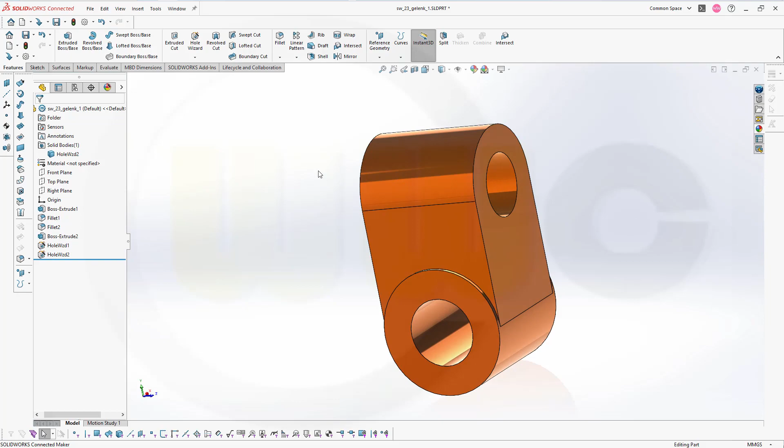Let's take a look at the drawing. Here it is, and you could make a screenshot, but I think it's a very simple exercise, so you might not need it. But let's have fun with SolidWorks.

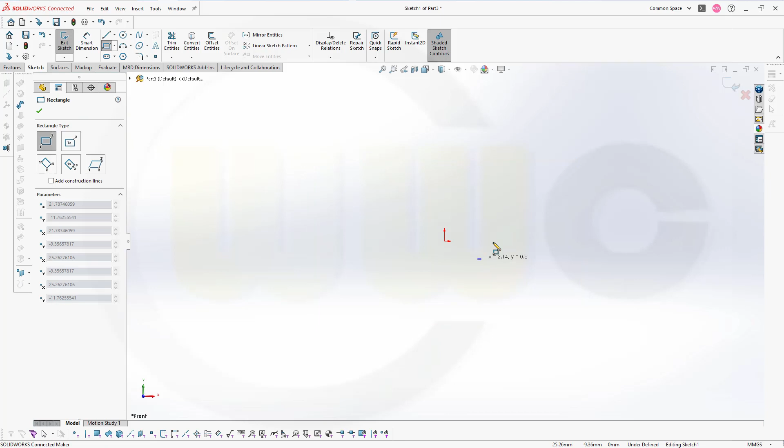Let's start with a sketch on the front plane. I need a rectangle, and this should be 56 by 118. Let's make it symmetric by using the origin and the midpoint of this line here, make it coincident. Finish that sketch.

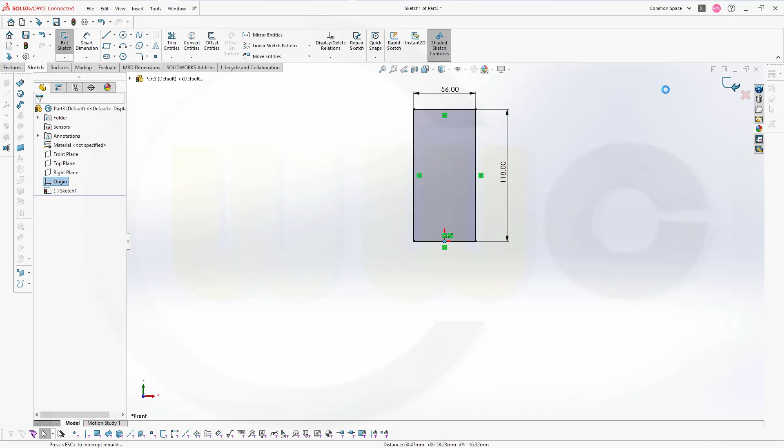Now let's make an extrude. Make it mid-plane so it's symmetric and make it 60 millimeter. Confirm. Now let's go for a fillet. I want to have a full round fillet.

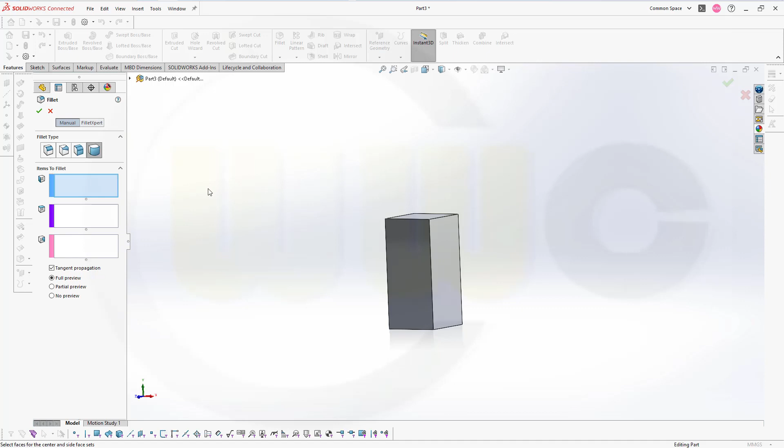That's the first face, that's the second face, and that's the third face. Confirm. Go for another one.

First face, second one, and third one. Confirm.

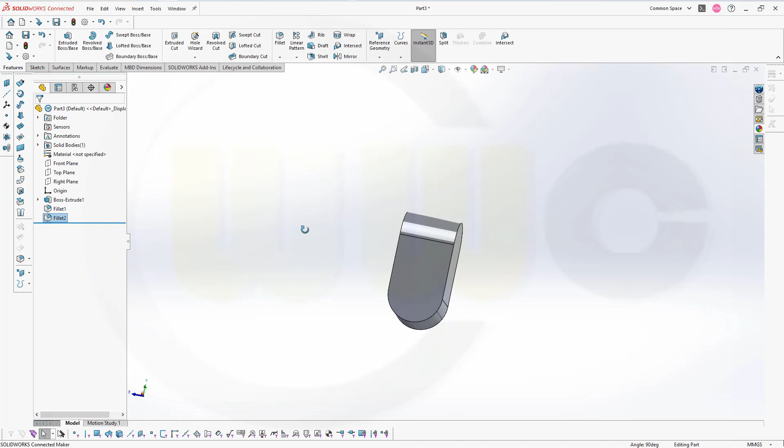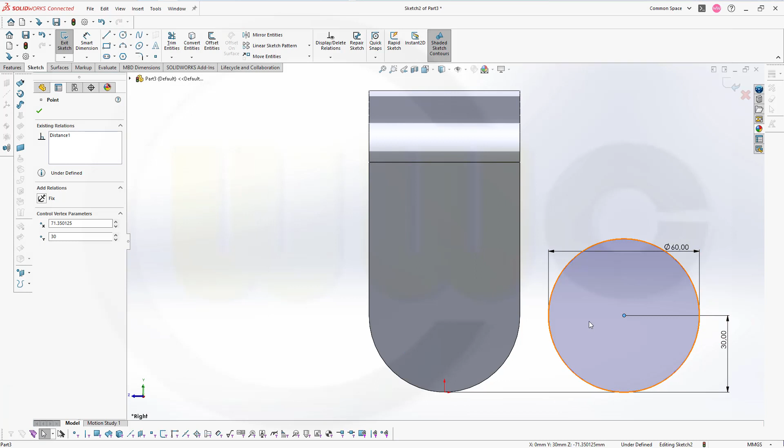Now another sketch on the right plane. A circle. Diameter should be 60. The distance between this point and the origin should be 30. And this point and that point here, this point and that point here should be aligned vertical. Finish that sketch. Make another extruded boss base.

Make it again mid-plane. Make it again 60 millimeter. Merge the result and confirm.

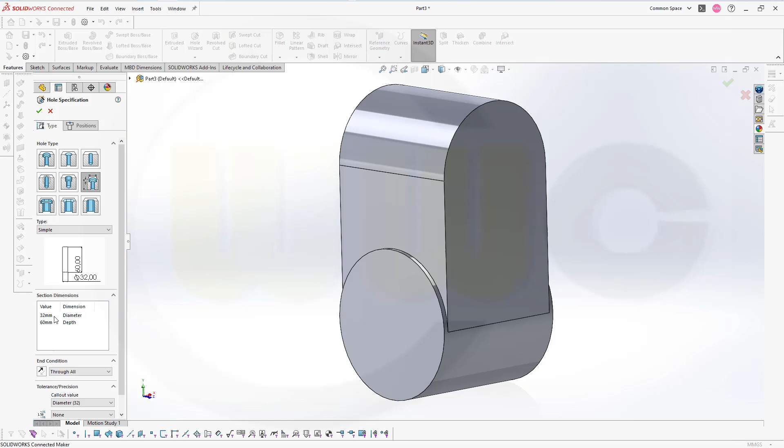Now let's go for a hole. That one, and diameter should be 32. Go for position, select the surface, go to the edge, snap onto the center here, confirm.

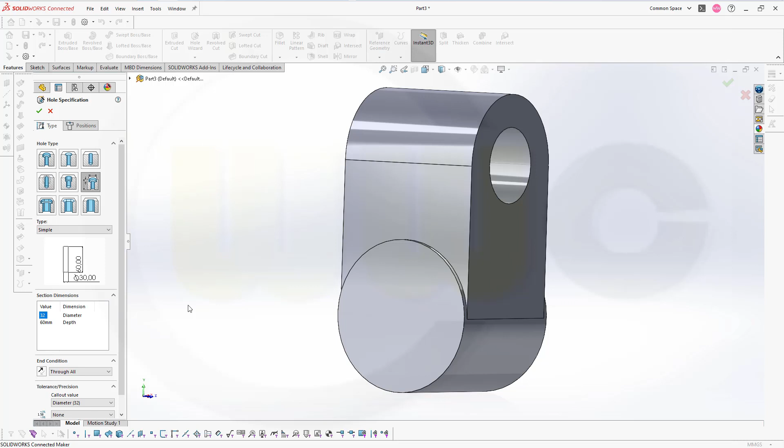Go again for the hole wizard. Now the diameter should be 32. Go to this face and go to the edge and then snap onto positions, select the face, go to the circular edge and then snap here onto that center point, confirm, and I'm done.

So hope this was helpful, hope you liked it.